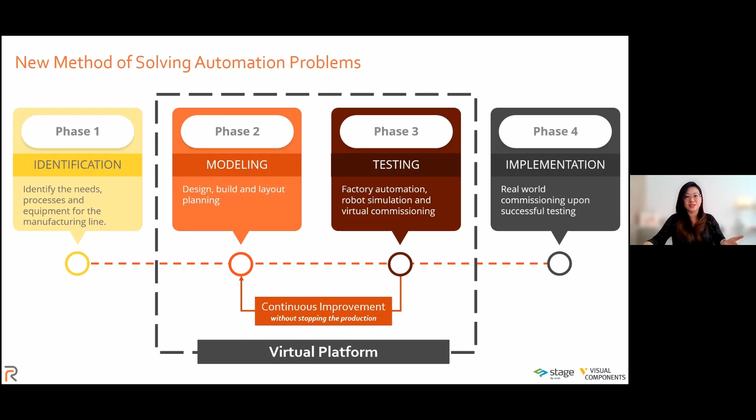Static recurring plans have been increasingly risky from a manufacturing perspective since the pandemic. There are a lot of changes and they are moving so quickly it's hard to keep up. Why? Because you cannot ramp up or slow down your manufacturing in a heartbeat, since you don't know the impacts or the effect on logistics operations. Right before this session, Richard from HML was talking about how freight and even land logistics are increasing in price. So it's something we cannot solve just by going back to where we were pre-pandemic.

To keep it simple, a manufacturing strategy plan has 5 steps. The first is to always improve forecasting, standardize production planning and scheduling. This means creating alignment between demand expectation and capacity utilization.

That's very simple. The third is to utilize digital twin and analytics, which is something we'll talk a lot about today, and why Kenneth and Dr. Chua invited me. The fourth is to integrate the supply chain.

I'm not talking about just having the right material at the right time for your production, but also integrating all your supply chains together, because one of your other suppliers might or might not have what you need, which would consequently delay your production.

And the fifth one, something I personally like to talk about, is real-time planning modules and communication. It has to be transparent, and it has to be as responsive as possible, adjusting your production plans to maintain value and keep things moving no matter what event might occur.

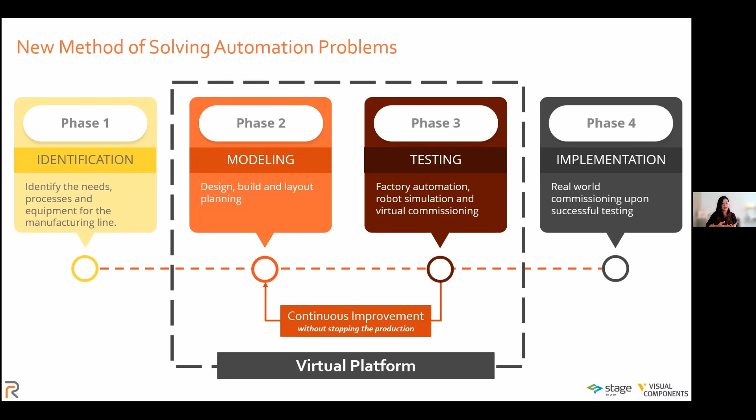This can only happen with digital adoption. We have to move away from how we used to do things, like spreadsheets, where only the operation manager might know what's going on the floor. We have to keep it very transparent. That's why I put transparency as one of the key things for real-time planning modules and communication.

What we see in phase 2 and phase 3 is something a virtual platform can help with. That's where digital twins, or digital factory as you call it, and analytics come in. The value is that whatever we do on the virtual platform doesn't stop your production at all, but you still get to study how you can improve by ramping up or slowing down certain production lines, and how that affects your business as a whole.

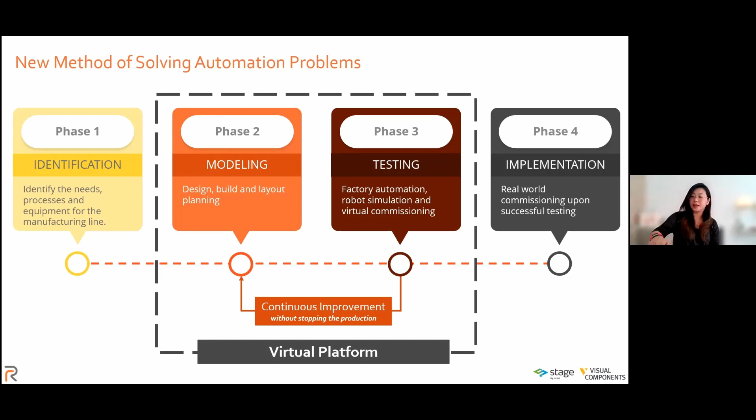I'm not going to take up too much of everyone's precious time with this keynote, but one of the main concerns stakeholders always raise is: how do I know it's the right decision to automate a certain process? Whenever people come to us, that's what they ask. It's true we have no one-size-fits-all answer—everyone has certain parameters and limitations when it comes to automation.

This has been even more challenging these days, because with global lockdowns and strict entry-exit protocols, stakeholders, suppliers, vendors, and partners were not able to hold meetings as we used to. There were no site visits, no surveys, no game plans—you don't even get to see. All you see is a 2D face, 2D drawings. Maybe if you're lucky, your supplier or solution provider has 3D models that could shed some light on what you're getting into.

But what if I told you that what we'll discuss later on digital twin is a way to bridge this gap? What if layout planning and design could be iterated live in a meeting, and you could say, 'No, I don't want this thing here, it doesn't make sense to me,' and it would be moved immediately for your sake?

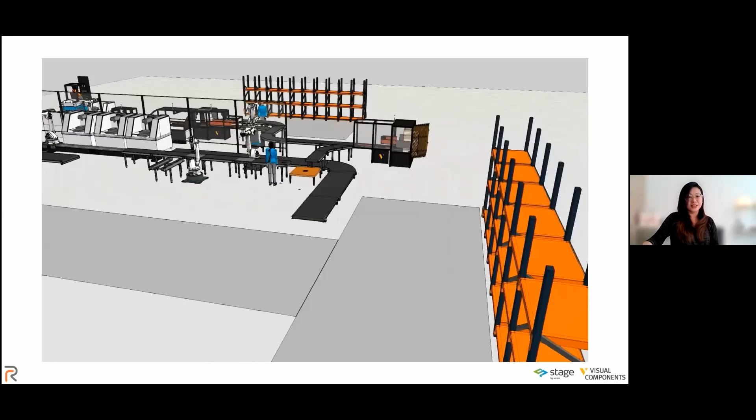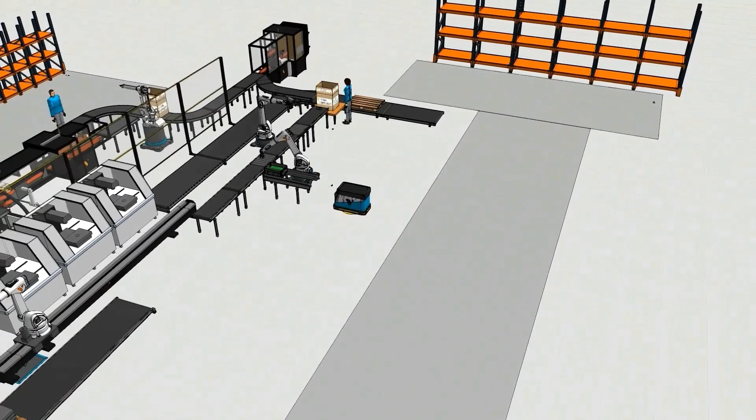Welcome to the August teh tarik session with Messe Worldwide and SHRDC. I'm Zach. You're watching a Visual Components showcase video by Robotics. Visual Components is a 3D simulation software that helps you visualize and simulate your production line in a virtual environment. In today's video, we're going to show you what Visual Components can do. What we're looking at right now is a simulated factory layout that produces two kinds of products. Mind you, the simulation you're about to see is sped up, otherwise it would be too slow.

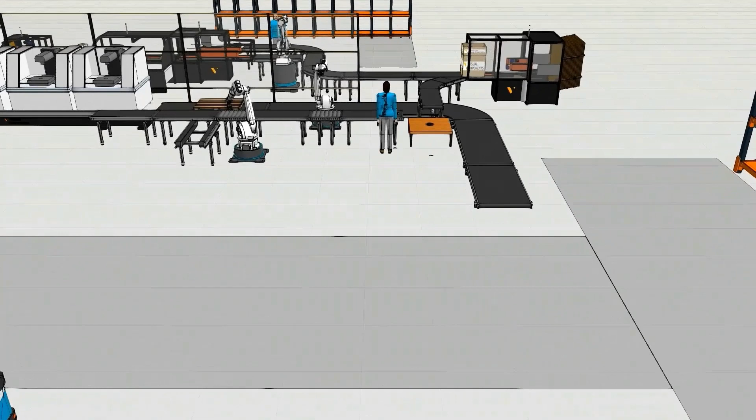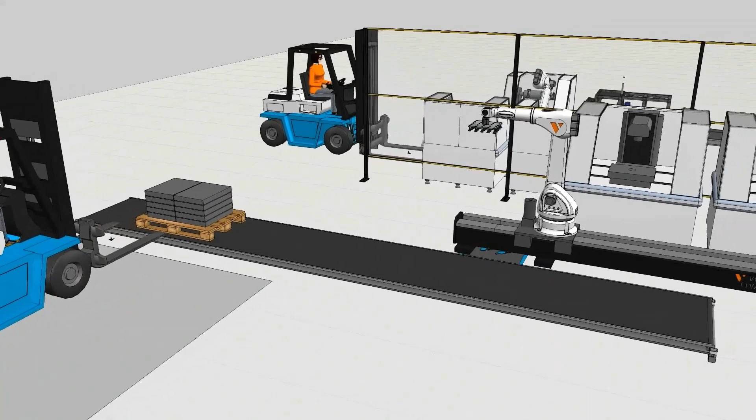This is the first production line we're going to be looking at. Now that the simulation has begun, we can see a mobile robot replenishing the production line, bringing in a basket of green boards, and a forklift bringing in a pallet full of raw products.

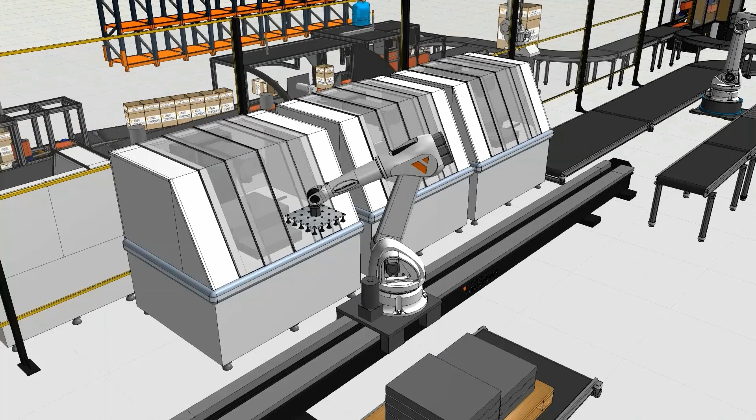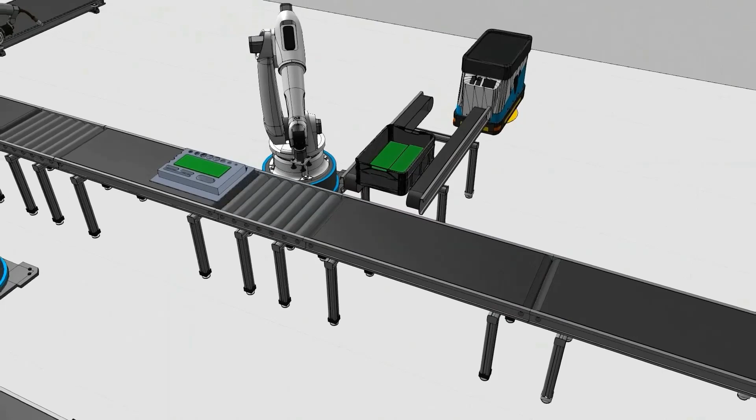Next, a robot mounted on a robot positioner moves the raw material onto a CNC machine to be processed. It is then placed onto a conveyor to be assembled with the green board. We can see it being welded together, and lastly, a human puts the final product into a box.

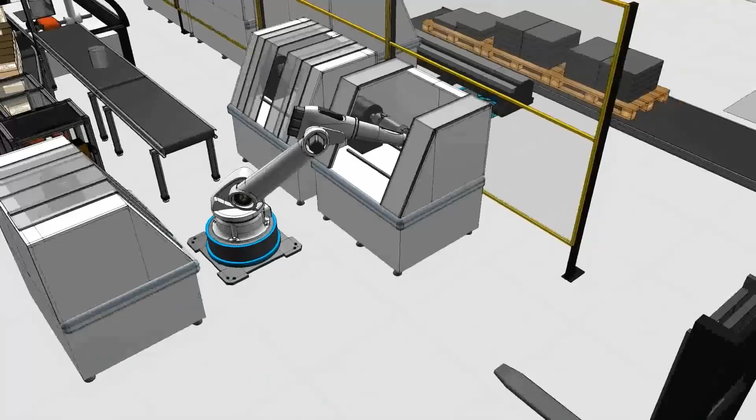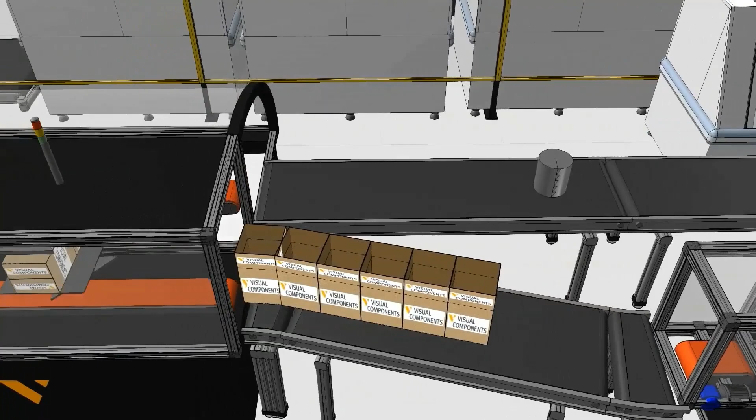Jumping on to the next production line, the product this time is a cylinder. I'm using a cylinder for illustration purposes, but we could replace this with anything. After the material is processed, the product moves into a machine called the box filler to be packaged. A robot puts the packed products into a carton box.

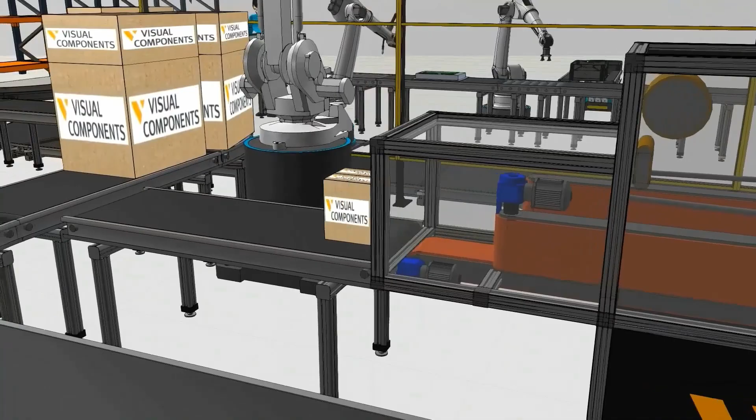In Visual Components, the robots can be programmed to stack products into boxes. It then goes to a human who tapes the box up and transfers it to a shelf to await shipping.

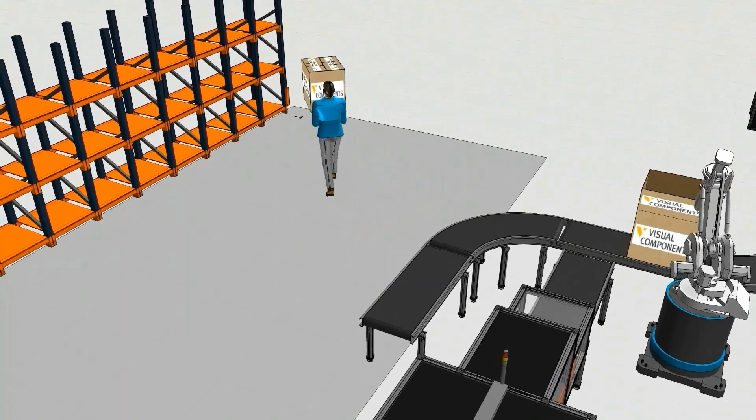Going back to production line 1, we can see that the pallet of raw products has been emptied. The robot transfers the pallet onto a special conveyor that sends the pallets to the end of the production line.

When the box is filled up, a human tapes the box up and loads it onto a pallet. Lastly, a forklift picks it up and loads it onto the shelf.

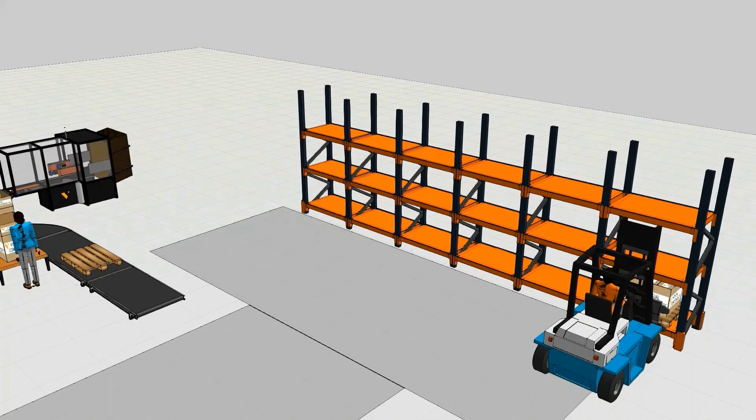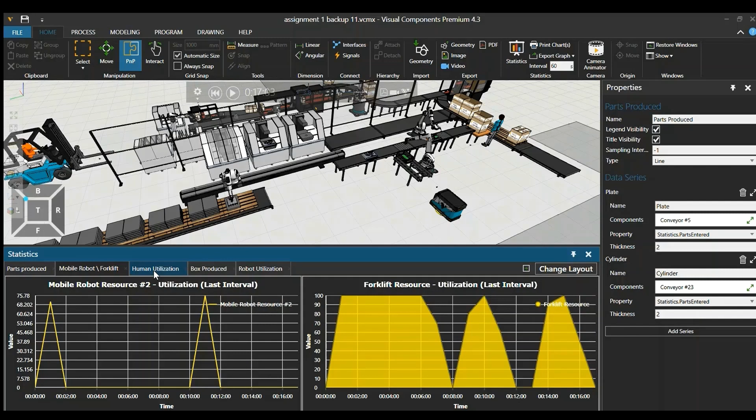Moving on, we can access the statistical data of each component in this model. Here we're looking at parts produced against time. We can look at the mobile robot and forklift utilization rates to see if you really need them, human utilization rate, box produced, robot utilization rate, and much more. There's much more statistical data you could view depending on your needs.

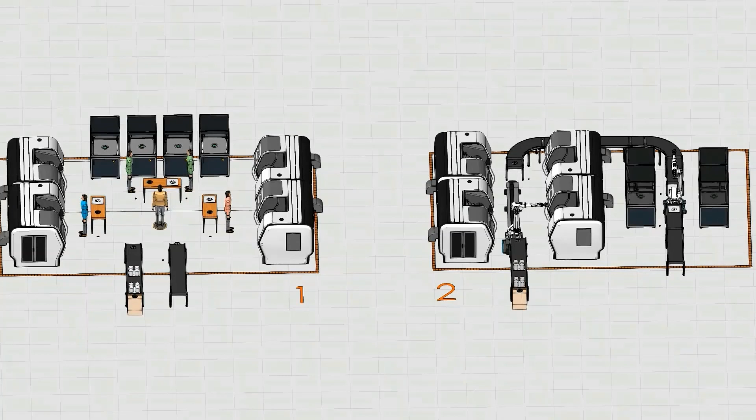Now, here we have an automation study model. On the left, we have a model that processes a set of tasks using humans, and on the right, the tasks are fully automated using robots and conveyors.

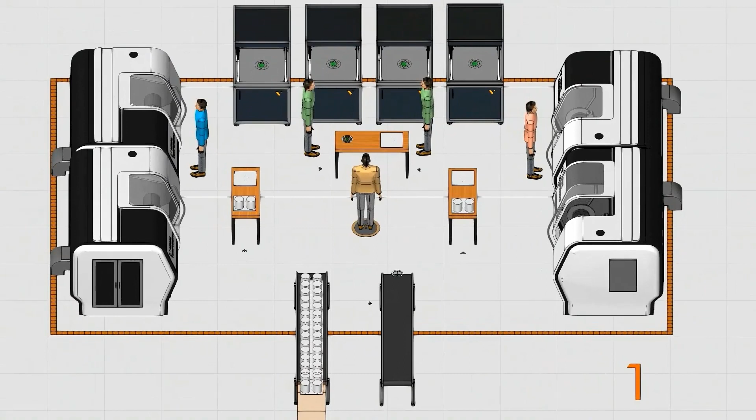The item goes into a lathe machine to be processed. It then proceeds into a coordinate measuring machine to check its dimensions, and lastly, it's transported out on a tray as a completed product.

Here, the tasks are the same. The only difference between the two is that one is operated by human operators while the other is fully automated.

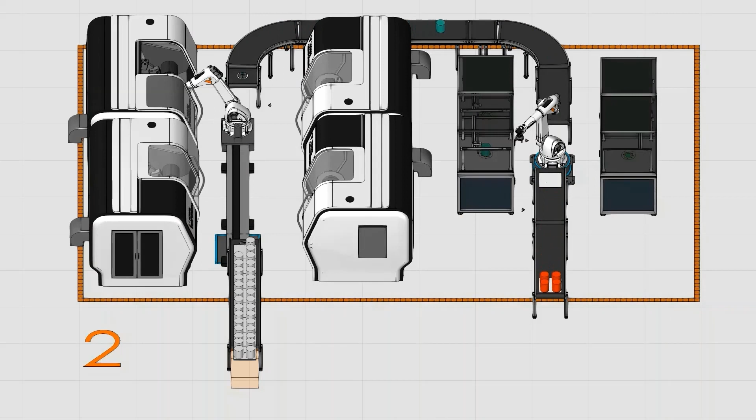After about an hour of simulation, we can get the statistical data for each layout. Here we can see that the human-operated layout is producing 34 parts an hour, while the automated layout is producing 36 parts an hour.

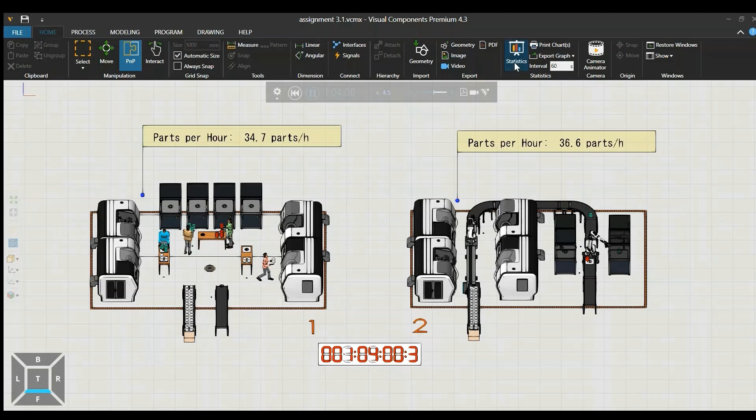These are not the only statistical data we can look at. Going to the statistics tab, we can check idle interval to see which robots are working harder and which humans are working more, human travel distance to see how far they walk, and machine usage to see if machines are utilized well. There are much more data available, and this can be exported to Excel for further analysis to improve your model.

Visual Components comes in handy if you're looking to optimize your production line and are trying to visualize what it will look like. It's also good if you want to assess whether the investment to automate is worth it.

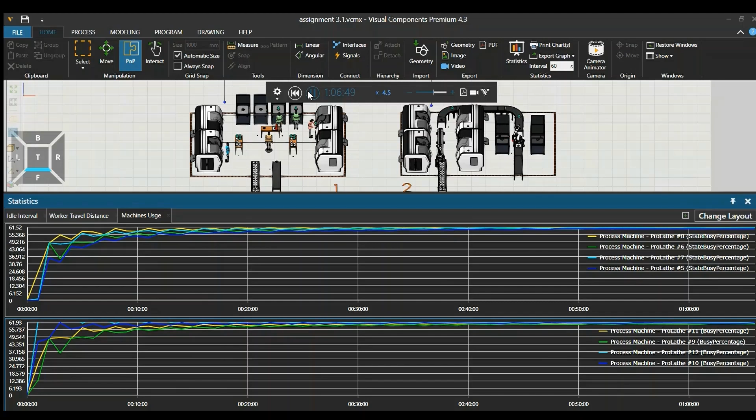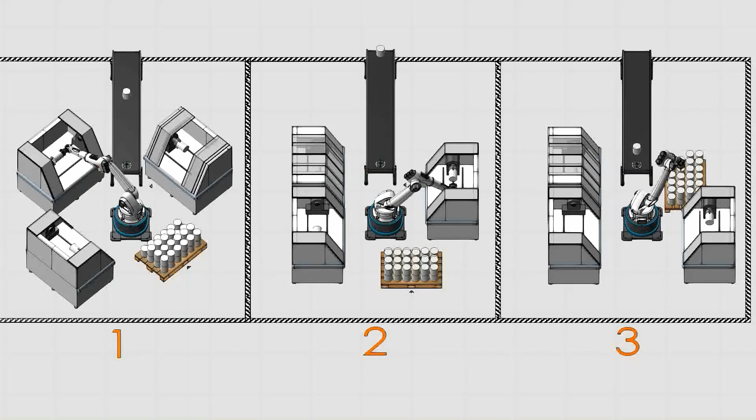By looking at this, you probably couldn't tell which layout is the best. Likewise, Model 4 and 5 have the same machines and processes, the only difference being its layout.

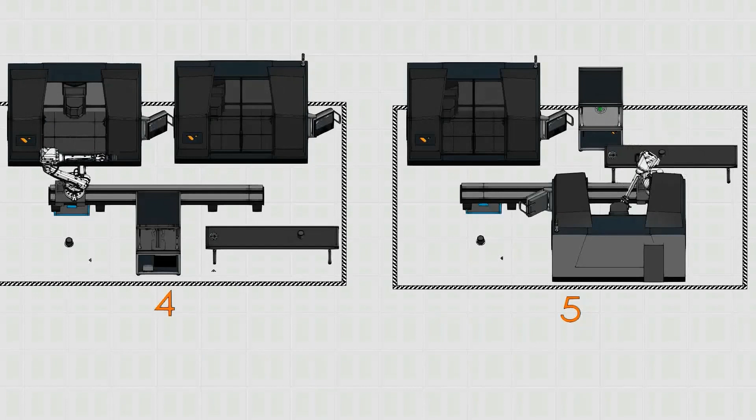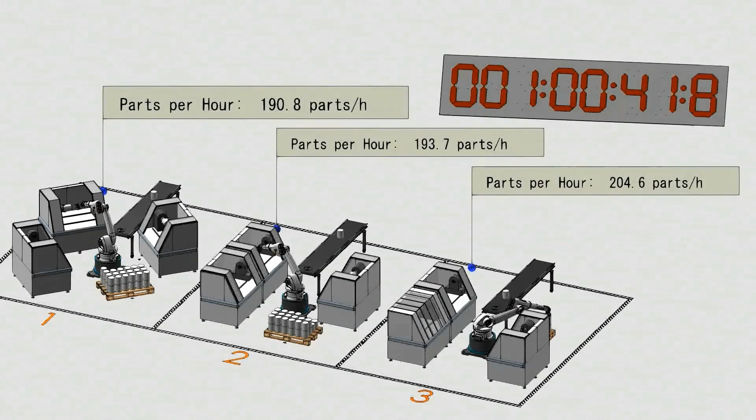After an hour of simulation, we could get some stable results. Here we can clearly see that layout 3 is superior, producing the most number of parts per hour. And between layout 4 and 5, layout 4 produces the most number of parts per hour.

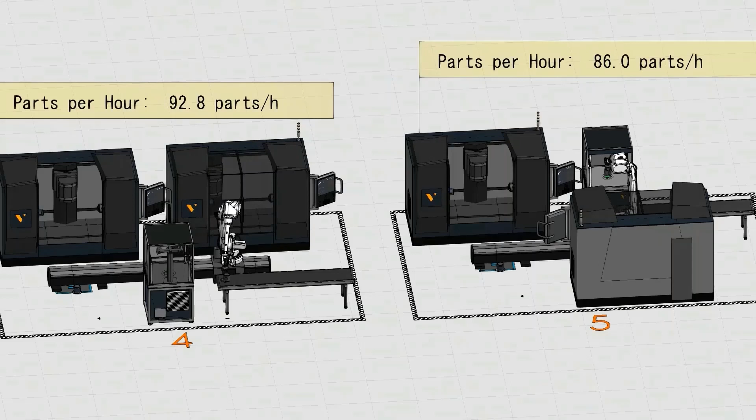Visual Components allows you to simulate hundreds of layouts to find the one that's most efficient without having to spend a dime on real-world testing. In this industry, space is also limited, so it could be used to find out how we can optimize the space for maximum productivity. Now, that's the end of the video.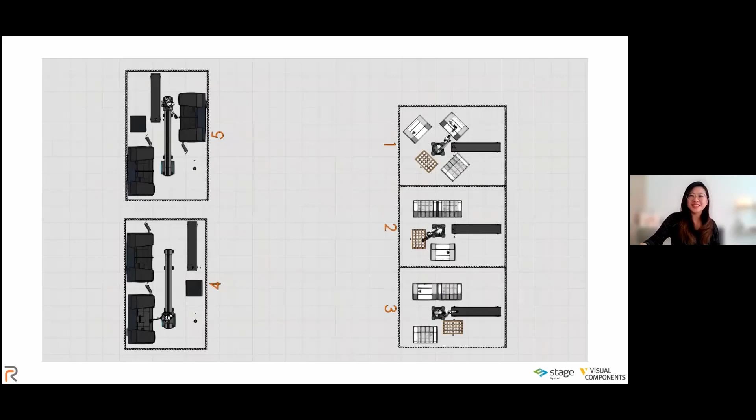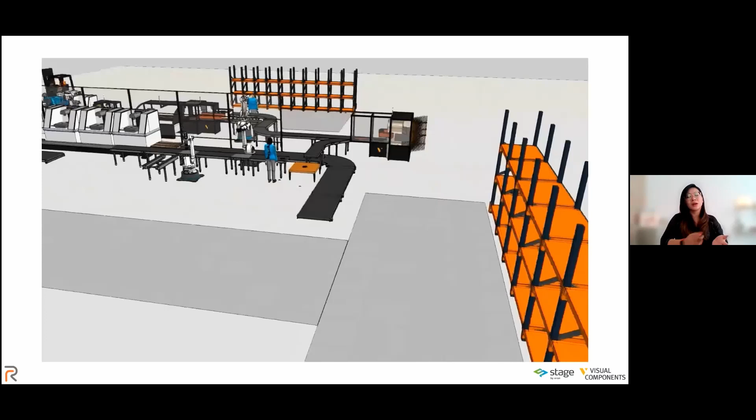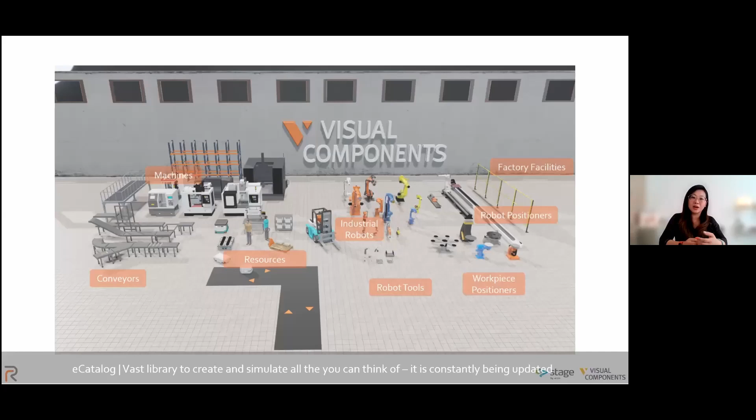When we do visualization and simulation, one of the things to make your digital factory or future factory as realistic as possible is to have a big e-catalog in Visual Components itself. We have all sorts of things inside: factory facility, robot positioner, workpiece positioner, industrial robots, robot tools, grippers, handlers, CNC machines and different sorts of machines, conveyor belts, and resources like human operators and mobile robots.

It will show up in statistic data as resources, so you will know whether it's worth it to put a human operator to operate your production line, or if it's more productive to put a mobile robot there.

Visual Components e-library is something we're very proud of. It has more than 2,400 components. We have over 35 layouts you can choose from, and what you have there is one of them. We have over 70 actual branded robots, the common ones like Kuka, Yaskawa, Fanuc, ABB, the top 4, and then a lot of smaller brands as well, which is very rare. In a lot of other simulation software, you might not get this much branded robots.

Because we have this many branded names and smaller ones, we have around 1,400 robots for you to choose from, and our robots are actually true 3D models of the actual brand. So whatever we put inside the 3D environment, if it fits according to your layout, it will fit to your layout. You don't have to worry that the initial provider told you it would fit, but when the robot arrives, it could barely get through your front door.

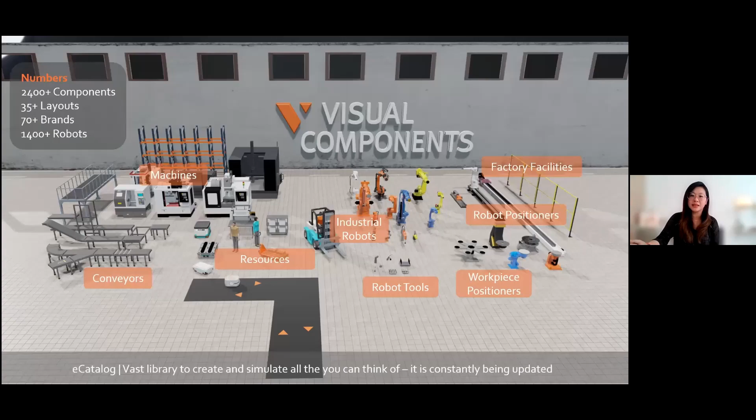The reason we have that long 6-minute demo to showcase different production layouts and what 3D simulation can do in a 3D environment is because we want to show that information is power. Before you make any automation investment, you need to know exactly what you're going to do and understand the possibilities, because layout makes a huge difference when it comes to increasing or decreasing productivity. Before you make any investment, it's important to have a very informed decision. When you have all the information you need, you'll know if this is the right decision or not.

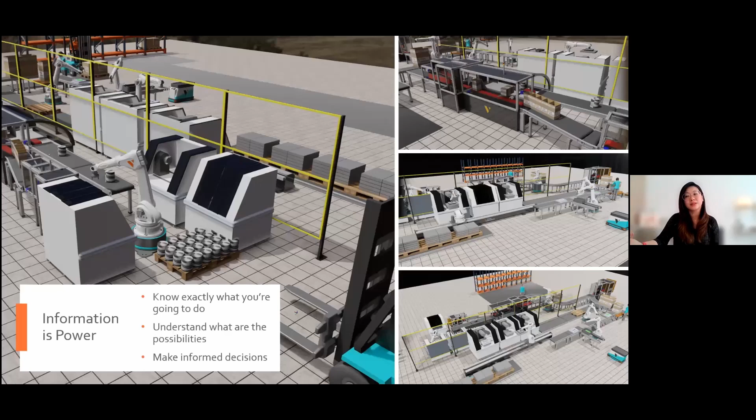Apart from Visual Components, we also have another virtual reality platform called Stage. It's a real-time 3D conference tool for professionals, built especially for engineers. Anything to do with CAD models and simulation can be done there, mostly live. But due to time, and because I think the discussion would be more interesting, we'll move this along.

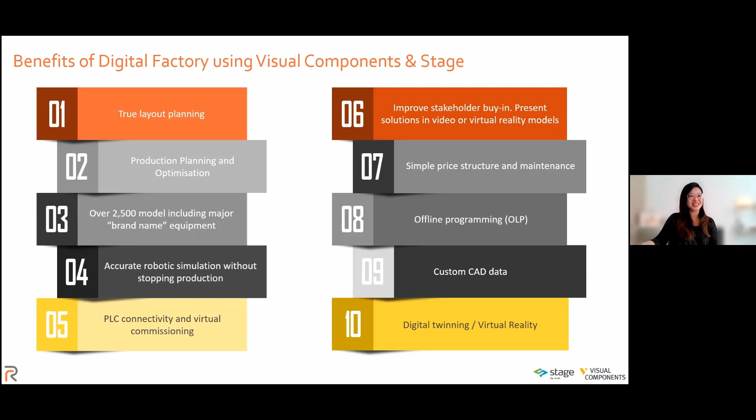So I will take another quick 3 minutes of your time to give a quick introduction of Robotics, so Dr. Chua and Kenneth don't have to ask me anymore.

Before we jump into the session, I want to introduce ourselves. Robotics is a Malaysian robotics startup. And because we like our logo so much, we actually trademarked our logo. Yeah, you can't use our logo.

If you're curious about us, I think you should sit down, grab a coffee. We're going to have some conversation later on, and take a bit of time to introduce ourselves.

We come to work daily because we want to solve the automation problem. Our co-founder has been a robotic engineer his entire life, and our current team consists of aspiring robotic engineers. We are a team of 10, 5 in Malaysia and 5 in Thailand, and one of my co-founders is actually in Thailand. Based on the years our co-founders have been in this, we are above 40 years old in the robotics industry, and we are familiar with the industry, robots and its application.

Why do we think we are an engineering company? Because right now we have 2 channels. The first is our actual core product, industrial robot development, where we work with international companies on development projects. Our second channel is 3D simulation and real-time 3D conference technology. You have seen the Visual Components part; I don't have time to do the 3D conference part, but maybe next time.